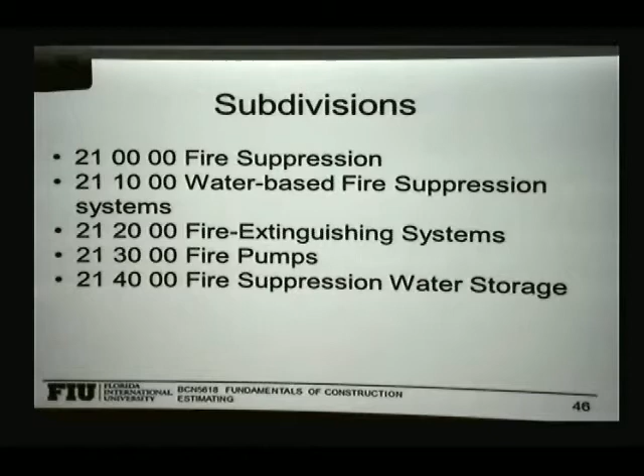Then we have the fire suppression equipment. There are different types, water-based, foam types, you need fire pumps, and a lot of other items.

The takeoff for this, often what I've seen is that you count how many sprinkler heads you have, and then use that as a base for the estimate. You will multiply by a cost per head.

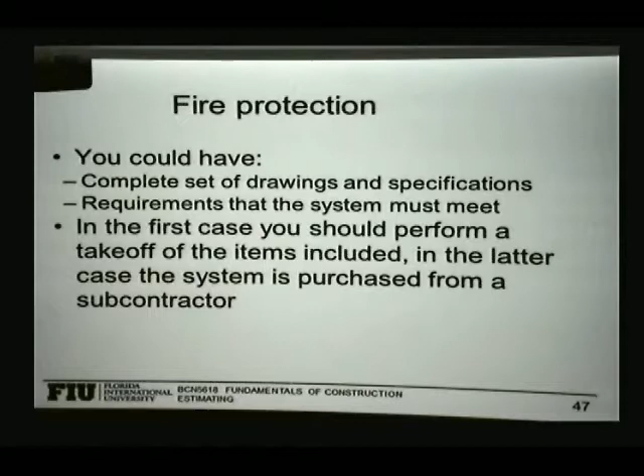Other times you're given a cost per square foot that includes the whole system. So it depends. If you're not into fire protection, most of the time what you will do is a quick takeoff of how many sprinkler heads you have and estimate that by the area.

You may have underground services, valves, pipes that take water to the different levels, and then branch lines that go to different rooms. And at the point of use, you have these sprinkler heads.

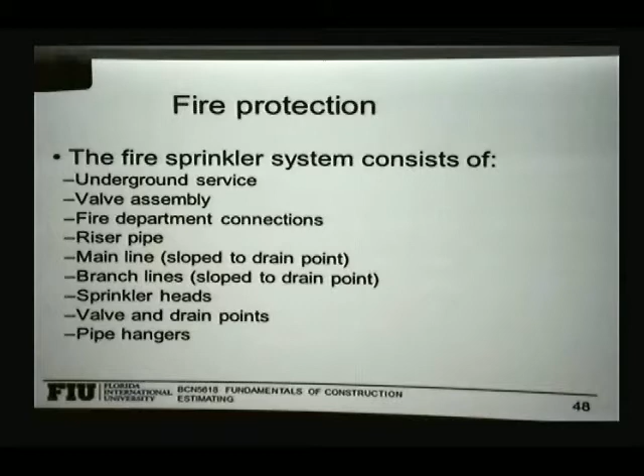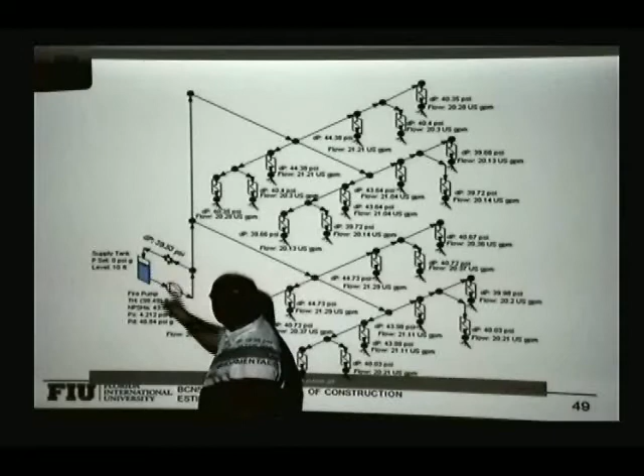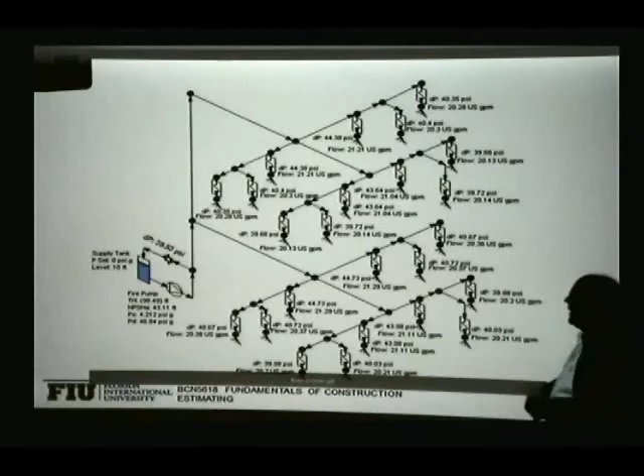This is an isometric of a sprinkler head system. In this case, they have a water tank with a pump, some recirculation system to test the pump and get things pressurized, and then the piping system to provide water to all these different points of use.

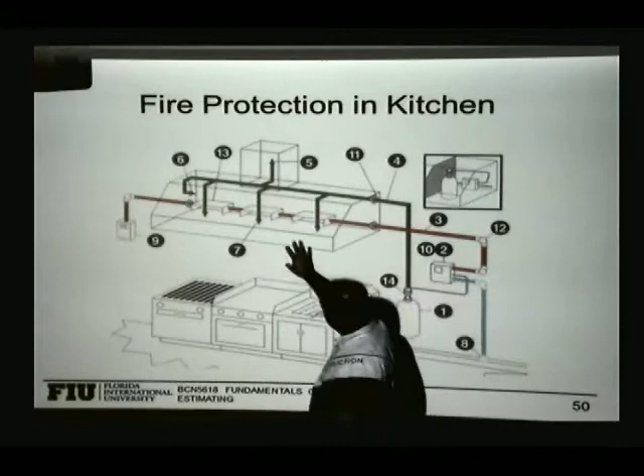You may have specialized equipment also for fire protection in kitchens. These you can see in restaurants or commercial kitchen installations. The idea is that when you're cooking, you may have grease that accumulates on those hoods.

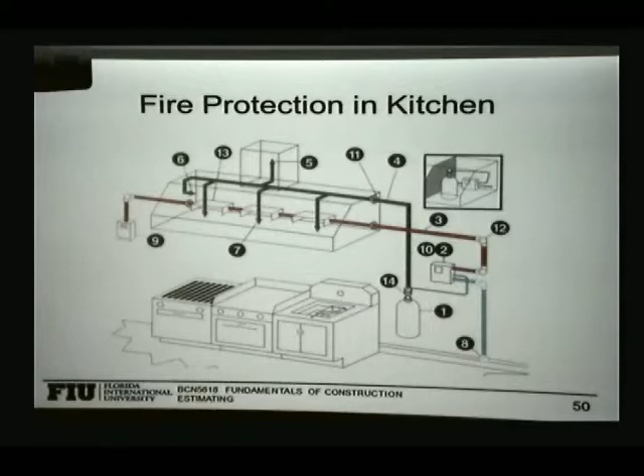And that grease can catch fire. So you need a system that's able to turn off that fire very quickly without damaging the equipment in the kitchen. So there is a specialized system that can do that.

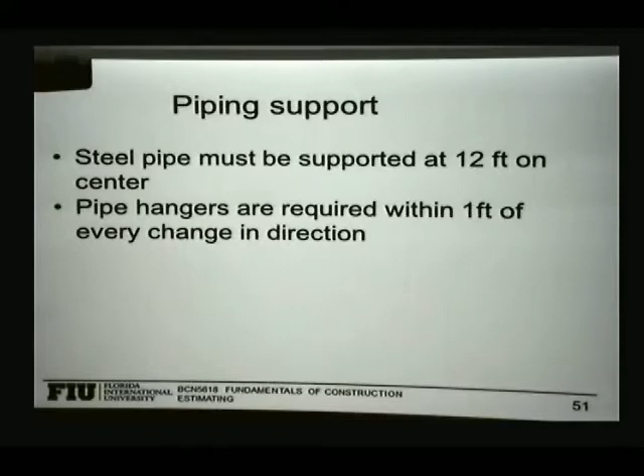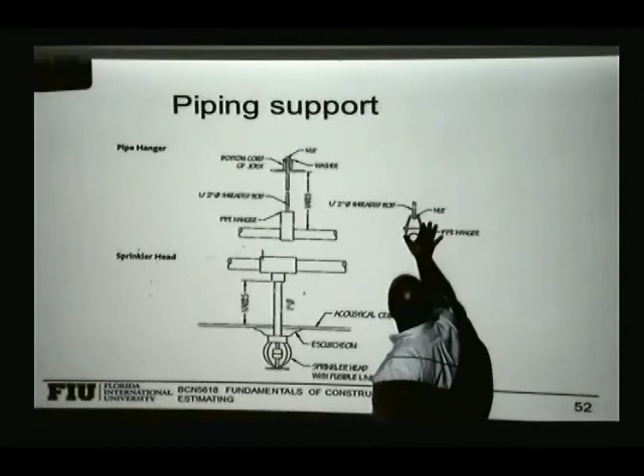You do need to have pipe support. The piping system that takes water to the different points needs to be supported. So for that, you need to have hangers, and some sort of way to hold that hanger from the roof.

Sometimes you put an angle or a support, and then from that point you drop down the different pipe hangers, and then you run your pipes into those hangers.

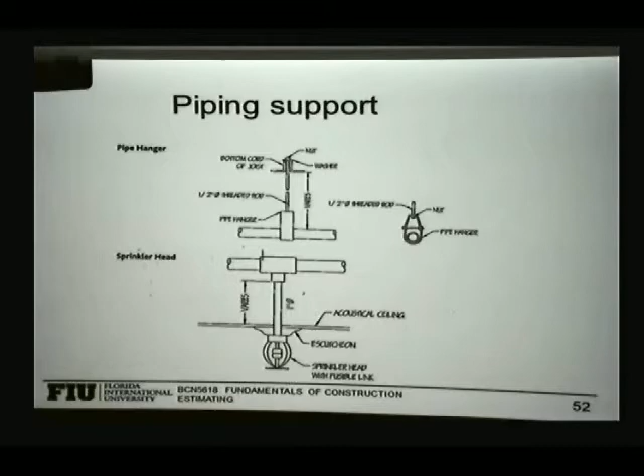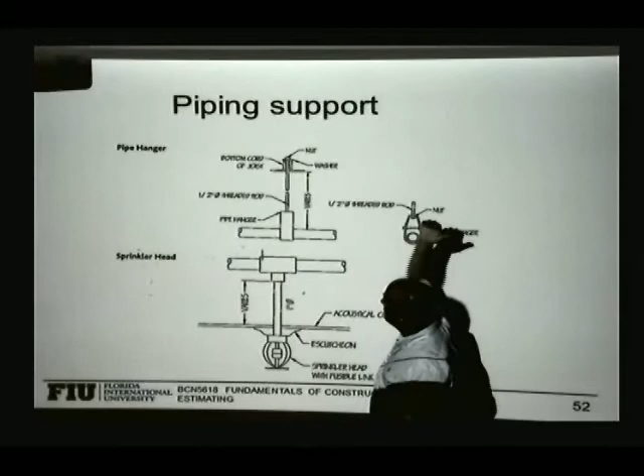At the point of use in the suspended ceiling, you may need additional finish. You have the pipe that comes over the roof, and then a T where you drop down the sprinkler head. So those are items included in the fire suppression system.

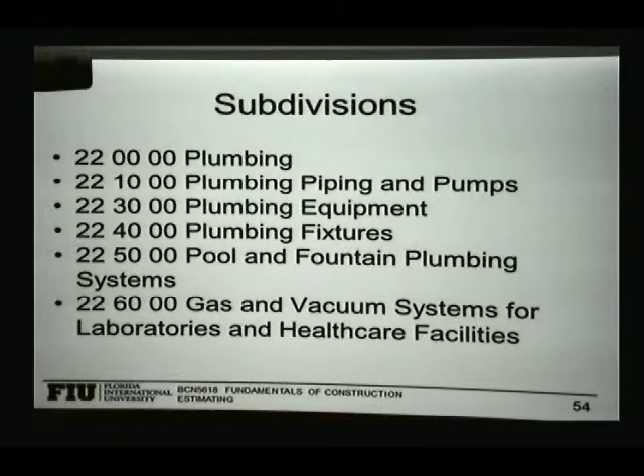Then we have plumbing. Plumbing has different types - pumps, equipment, fixtures, T's, valves, and so on. There could be different materials for piping: plastic, copper, cast iron, steel, depending on the use and the location.

There is a different type of pipes. Normally, the pipes are counted by the different diameter. So you have different diameters of pipes, and you will have one condition for each diameter. You will also have different materials, so then you have the materials and then the diameter.

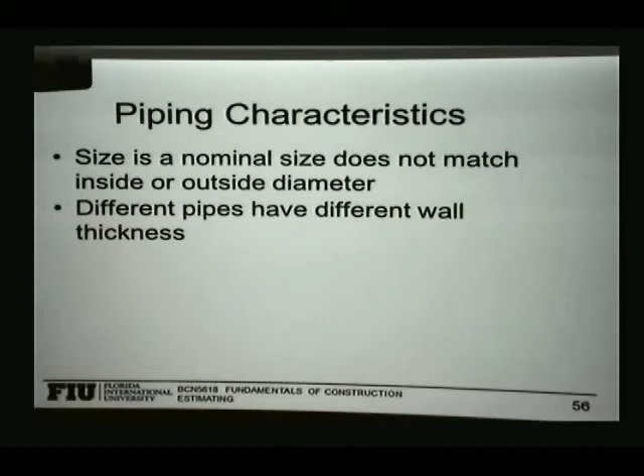So if you have, say, a copper 2-inch pipe and a PVC 2-inch pipe, those will be two different takeoffs. You will have one for each type and diameter of pipe that you have on site.

The plumbing system normally has a water supply, the water that comes into the building. Then you have the fixtures and equipment that provide water to the user, and then that water, after it's been used, needs to be drained and sent out to waste - the drain, waste, and vent piping that takes that water out of the system.

The water supply normally comes under pressure from the city or from a pump located on the building, so that's a pressurized line. The drain waste and vent works by gravity - after you open the water in the sink, that water will drain by gravity.

Because it drains by gravity, when the water moves into the pipe, it creates a vacuum. If you block that vacuum, the water is not going to move. So you need to have ventilation on that piping system so the water will flow. If the vents are blocked, the vacuum will not allow the water to move.

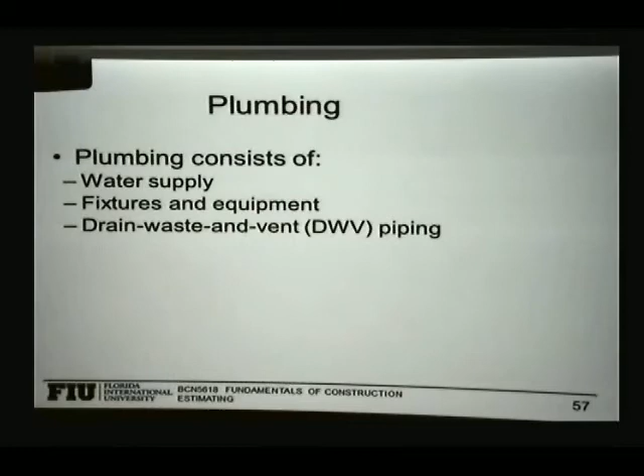When the water comes into the building, you usually have a pressure reducing valve that drops the pressure from the city level to the pressure you're going to use. Inside the building, it will go to the water heater. After that, you have two branches: cold water and hot water that go to the different fixtures.

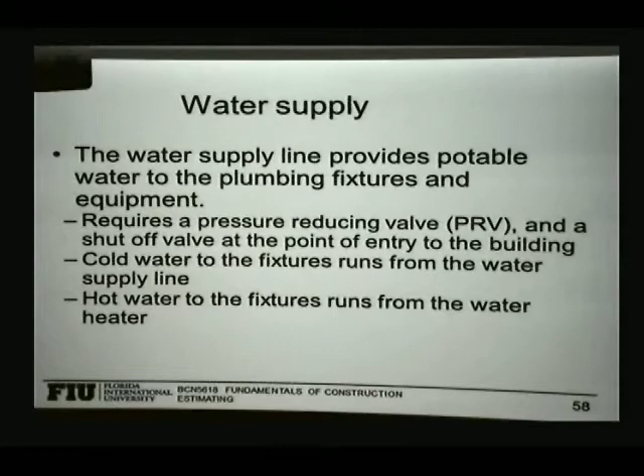In equipment and fixtures, you will have a shut-off valve at each point of use, so you can take out the equipment if you need to.

If you need to replace a sink, for example, you need to have a way to disconnect the water. So you need a couple of valves over there to take those lines out and replace the sink if needed. You need water lines, and then you need the drain line.

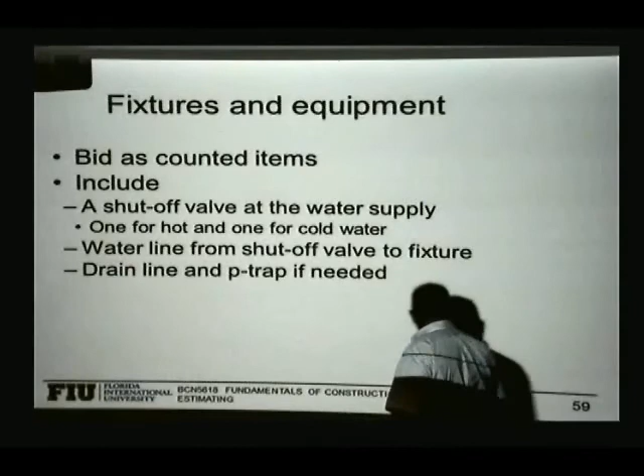Sometimes you also need to have a P-trap. A P-trap is a piece of pipe that looks like this, it has a U type of shape.

So if you have a sink over here and you put in some water, the water goes down and it sort of fills this U. The water over here will drain by gravity, but there will always be this amount of water in that line.

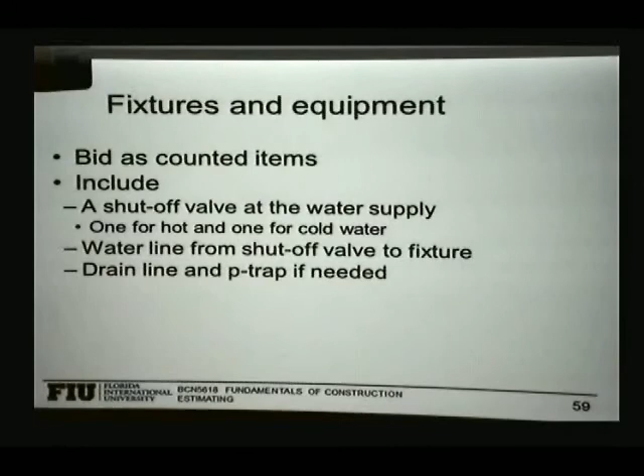The idea is that the gases you get from the drain system will not come into the room - they stay away because of that water seal. So some fixtures already come with a water trap. Others do not, so you need to account for those.

As I said, you need vent lines for the function of these systems. Sometimes you also need to have cleanouts. Cleanouts are pieces of pipe where, say you have a pipe that goes like this, they install a T here with a cap, so you can take the cap off and run something to clean that pipe. That's called a cleanout.

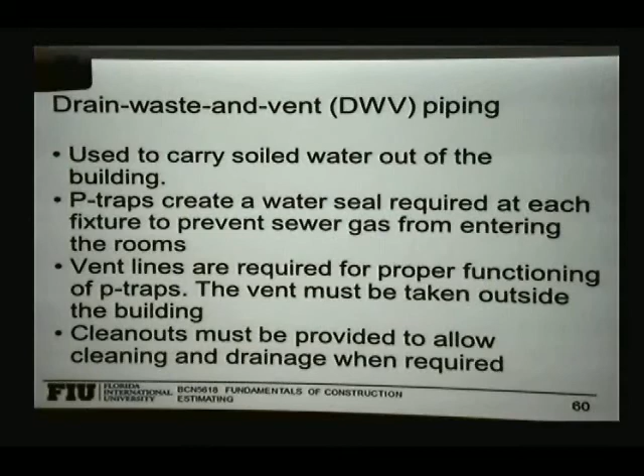You need to have cleanouts in your system also in order to clean the pipe when required.